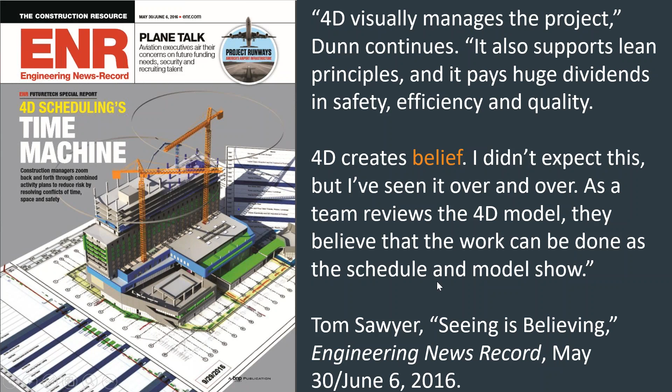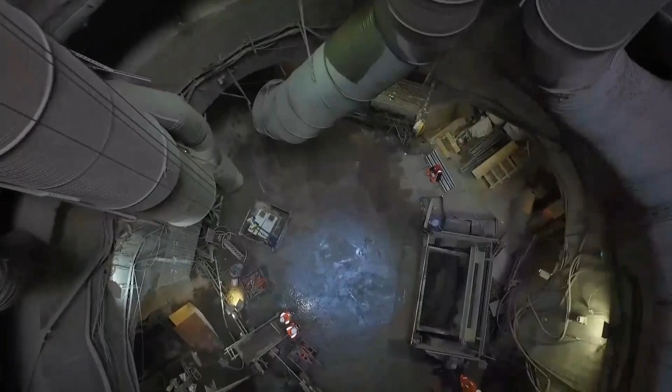I'm going to take a little different tack than I normally do. I encourage those of you who haven't yet read it to take some time if you want to digest more about 4D, this article by Tom Sawyer. Since we'll have some time together today, I want to tell you a little bit about myself. Construction is creating something where once there was nothing. It goes back to what is great storytelling, because as people we all connect with great storytelling. And what is storytelling? Storytelling at its essence is imagining something that is not and taking other people there with you.

So I appreciate that little clip. It's something that Synchro guys pulled out of some informal interview sessions. I'd much rather be out on a trail, and once we get off today, that's maybe where I'll head to see some of Blue Ridge. But we're looking at slides, so we deal with this as a format for communication. Got to put in a little plug. If you're on the West Coast for Airbnb, I had a great place at Oracle Open World a couple weeks ago where I was a 15-minute hike to this kind of view.

This is my family photo. This little girl, when she was 4, talked me into letting her drive her tricycle across the Golden Gate Bridge and back on a beautiful night, so it wasn't too bad. We had the sun setting on the Pacific and a full moon rising over San Francisco. And I've come to realize that as a parent, we're never really cut out for a challenge like that, to see life start, grow, be challenged, struggle, and hopefully eventually flourish and be independent. We come into similar problems on projects, and I'll be talking about some challenges we've observed and learned from in outages. But for me, the simple parenting truth I've come to shoot for is this: I want to keep the twinkle in that little girl's eyes. Remember that. We'll talk about it briefly at the end of our time.

There are a few things that I talk to every time I speak about project management or scheduling, and I don't apologize for that because to me these are very important principles. So what is scheduling? We're scheduling an outage or scheduling a construction project. Well, there's a science. We define activities, network logic, so we can track progress, predict completion. We struggle with that predicting completion part of the science, but we'll leave that aside for now. But it's also, and this is important, the art of communicating the schedule to stakeholders. We often forget about that, and because we forget about that, we fail by design.

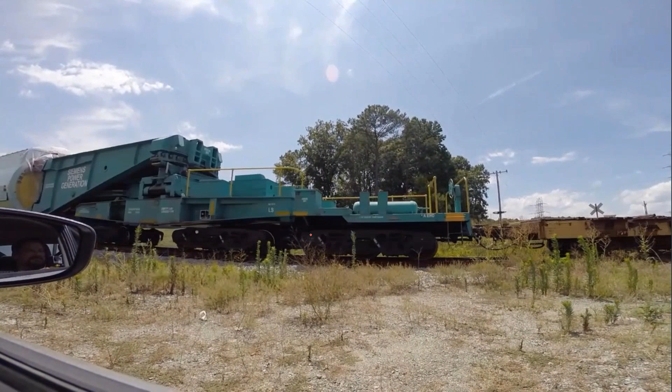It really is impressive, the things that a huge organization that's maintaining assets that power millions of homes and businesses can do. And just the effort to coordinate bringing this from the construction or manufacturing site to our site was a massive project.

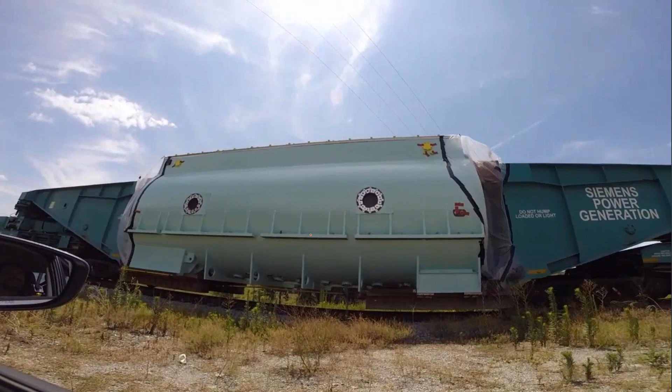So that number 10 lesson leads right into this number 9 lesson. Failure matters. We learn from experience. There's a Walt Disney quote. I've come to appreciate that we all need a good, hard failure. Now, I mentioned this to Tom DeGenis, and he sent me a quote from a politician that said, I've never failed, I've either learned or succeeded. Well, it came from a politician, so I'm going to call BS and say, no, we do fail. Let's tell the truth. But if we fail and learn, we can grow.

First outage, when we brought that stator in, we had a baseline target of 36 days, we went 69 days. By financial metric, by scheduled performance metric, that was a failure. There's a Disney quote for you guys.

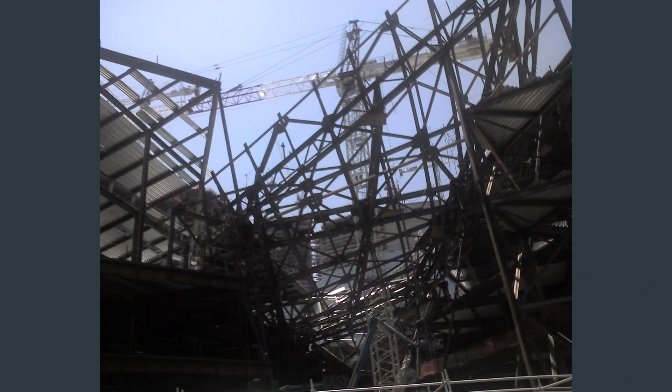Seen this kind of thing before. This is Las Vegas, the City Center project. That crane was the topic of debate when I was there in 2008. They didn't know how to demobilize the crane. They were worried it was going to cost them between a couple $100,000 to a couple million of unplanned dollars to demobilize the crane. Turns out they had a much bigger problem.

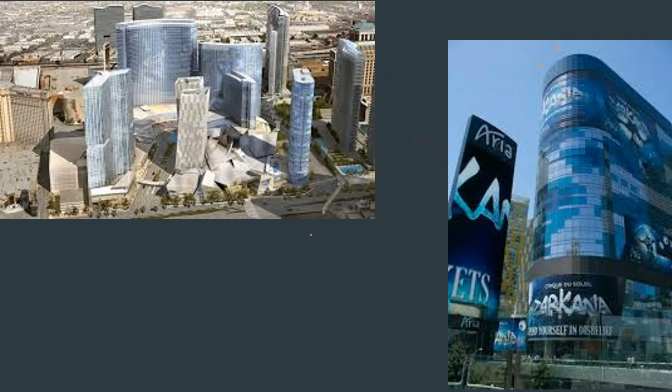Here you see the Harmon Tower. These top 20 floors were the top real estate of this, at that time, projected over $11 billion, largest privately funded project in the history of the world. They had to stop the tower right here because not too long after I heard about this crane, they recognized that in these first floors they had not tied off rebar correctly.

The project failed by a bigger metric. It killed 6 people, had 3 union work stoppages for safety concerns. Construction is an inherently dangerous and financially risky endeavor. But we have tools now and it doesn't need to be that way.

The project I was on, we sold a 4D effort. We had 3 years of services in place, and the day after that proposal was signed, this announcement was made, August 1st, 2008, that Boyd was suspending work on the Echelon project. If you go to the strip today, the steel is still there. It still looks the same.

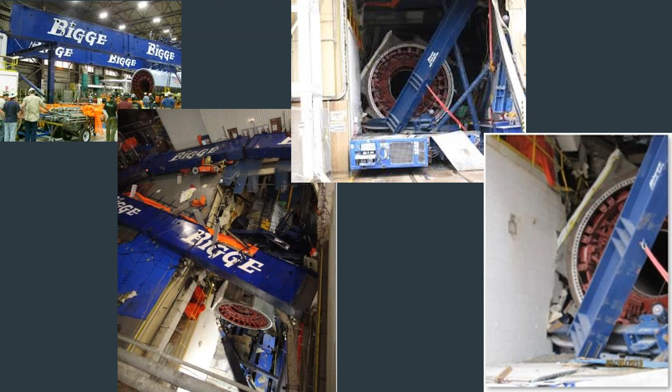We thought we had a failure fall of 2012, but the rigging device we used went to another site, and I stood next to these beams. They're about 2 feet taller than I am, and I'm 6'6". They're very wide, and those beams were in place in our facility and moved our first stator and our replacement. But at the next facility, there was a miscalculation so that as the stator was rotated to lower into the turbine bay, it collapsed. It fell into what is a switchgear room. Took both units offline.

We reset our expectations spring of 2013 when we saw this. We recognized that by some metrics, yes, we failed, but by another, we succeeded. We completed the project safely. We were putting power on the grid. Again, the worst part of the failure is that this young man did not go home that night. 3 other individuals who I sat with in a safety orientation 2 weeks before our outage went to the hospital that night.

These types of failures are not acceptable. And we have tools to have certainty, to get rid of risk, and create construction and maintenance, repair, and outage environments where we no longer have these kinds of stories at the end of projects.

Number 8, people, then strategy, then tools. Now, I didn't technically first learn this in an outage, but I've seen it really bubble to the surface. Here's a quote by John Wooden: "Players make plays. Plays don't make players." I've started to predict success first based on the team. Who's the implementation manager? Who's the project manager? Who are the supervisors? And no matter the tools we bring to bear, if the right players aren't in place, we're going to be in trouble.

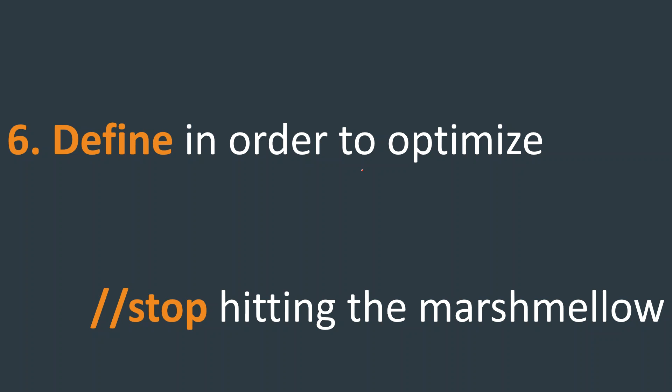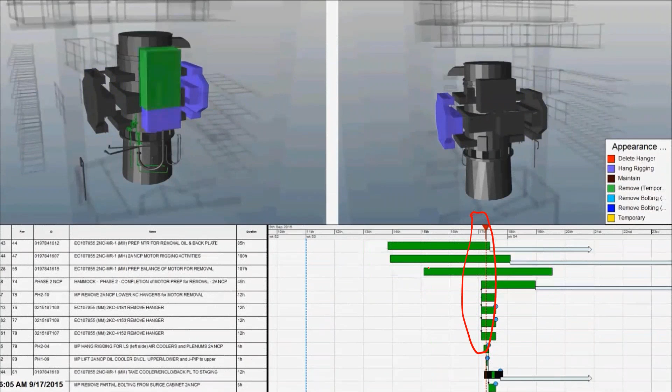We'll wail and wail at project challenges, but we've never defined to the right level of detail, and this is where I've seen 4D have a significant benefit, so that we can, for example, in this instance, understand every piece that we're taking off a motor and see with focus time. I call this focus timeline just a little bit of magic, that way it auto filters to what's working concurrently. But until we are willing to do this level of definition, we can't optimize. We're only going to get status quo or worse. We are not going to see better performance.

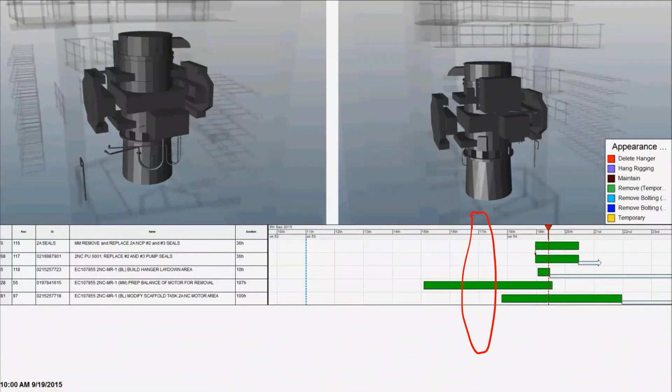The other part of this story is this is a work product of a young civil engineer who'd been in our building for 6 months, had never seen this motor, did the modeling from 30-year-old drawings, pictures, and hanger sketches, and became the leader in a lean review where we used this model and what we call a script that you'll see come up next with some very simple but down to the literally minute details of how we utilize overhead polar crane, lay down areas, and bring in key components.

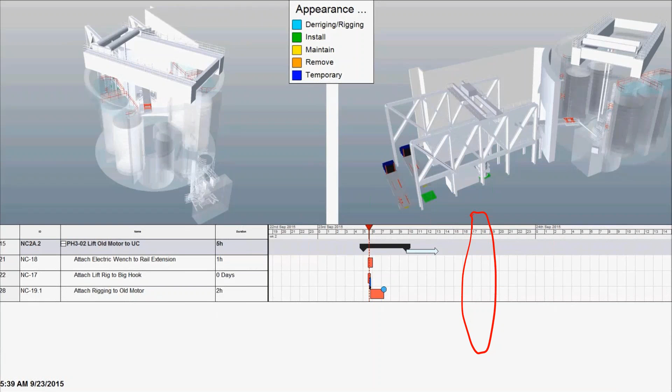I'll jump forward in this a little bit. And again, we took what had been an 8-activity schedule, turned it into approximately 90 activities. Those 8 activities were the smallest segment of an hour. We defined them down to 5 minutes. We understood every time we were moving anything and where we could, for example, consolidate more items, move them together.

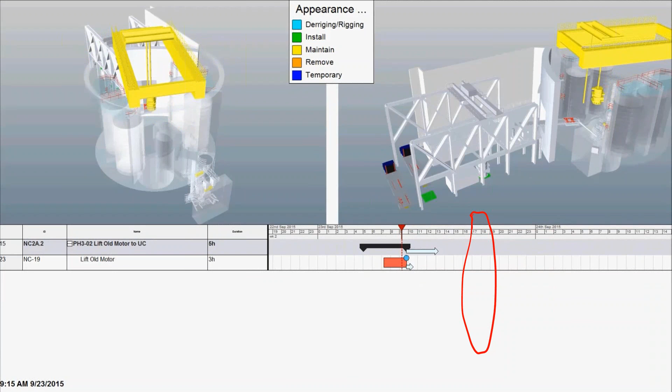We've moved from 42 hours of best performance to 25 hours at best performance when we own the polar crane. And generally when we have the polar crane for this project, we're on outage critical path. We define an outage critical path hour as having a value of $150,000 just for a ballpark number. So significant return on defining the problem so that we can optimize.

Know your priorities. This kind of baffles me now that I see how intuitive it is, but how often we fail to do this. What is your priority of work and why? This is what critical path should show us, but either we don't believe critical path or we run into problems and we lose our brains. And anyway, I've seen it where teams are just running around escalating everything and making everything urgent, which simply means nothing is a priority.

Congestion is only a problem if, and the answer to that is, you don't know your priorities. We'll have a congested workspace and, oh no, 2 to 3 guys or crews are supposed to be in there. What do we do? Well, that what do you do question should not be a question unless you don't understand your priorities. You work your priorities first, understand why, and then you continue on.

And just for personal curiosity, we raised concerns during an outage in an online tool. And so I tracked day by day, for all the work going on in an outage, some 13,000 activities, 1,000 to 1,600 extra employees on site, a significant volume of work, how many days during an outage would this congestion issue come up? And it was 100%. Every day I found an entry in that record where some crew tried to go do work and there was congestion.

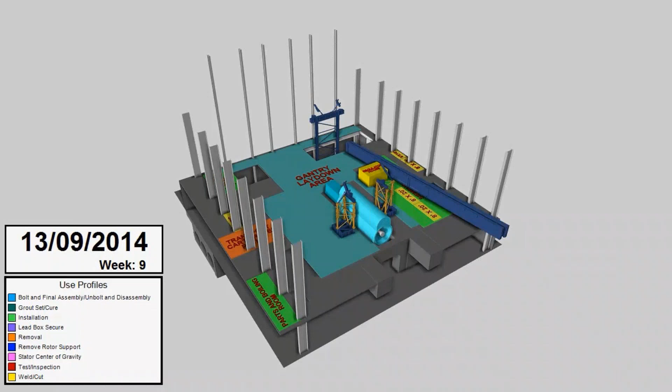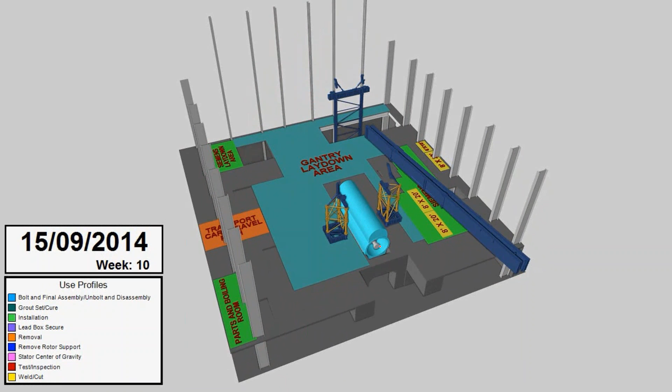This was a simple tool we used, didn't get down to level 4 detail, but to show the moves we were going to do, and this is how we planned for the following outage when we moved the stator. We had a different type of crane. The previous crane allowed us to articulate out of the way, so it was built before the outage. And the reason we would articulate out of the way is we're going to pull the rotor out, which is right there, using a different crane, but in this outage we could not pull the rotor with the crane from a different vendor. So we had to build the crane on critical path.

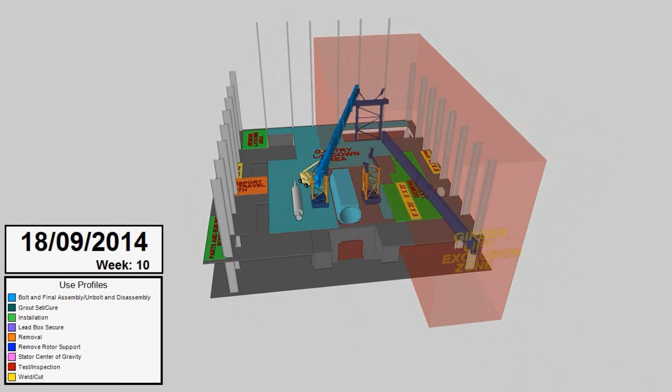So we want to understand these red boxes you're seeing we're using to communicate for safety. No work would be performed in those red box areas when these lifts were going on. And as it came time to lift the 1,000,000-pound stator, you can imagine there was significant oversight, interest, input throughout the organization on how we would manage that. And this became our tool for managing that work. So space matters. Space for safety, space for coordination, space for efficiency.

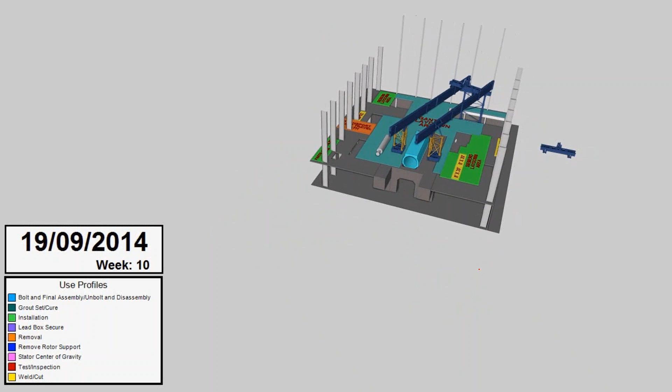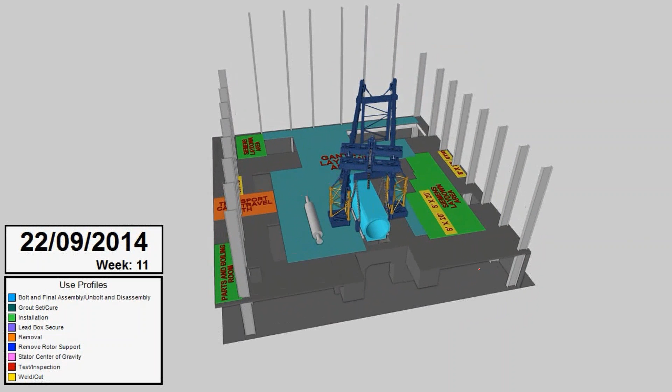And here comes the trolley that will lift and work on the stator. And this became the most valuable asset for both our safety manager and the primary vendor safety manager. We would export 3D PDFs to show what the site coordination conditions would be at a given place and time. So simple, but clear. There was no misunderstanding.

And we saw an additional value to this is that we could explain to the observers what the work would be, where the concerns were. They could raise additional concerns. And again, we were doing all of that explanation, not in the outage. We were working before the outage.

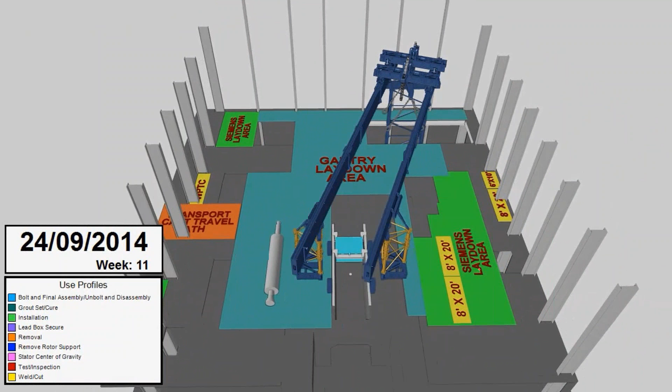Because often an observer will have a concern and they will stop work. And when you're stopping work on outage critical path, this is not good.

Number 2, simple truth creates the greatest sense of urgency. So I'll talk about how do we create a sense of urgency in our teams. Well, sometimes I'll argue that we drive away the sense of urgency because we confuse everybody. The plans aren't clear. The Gantt charts are illegible. The priorities aren't known. How do we solve that? Simple truth. And nothing creates simple truth for us, for an outage, better than 4D.

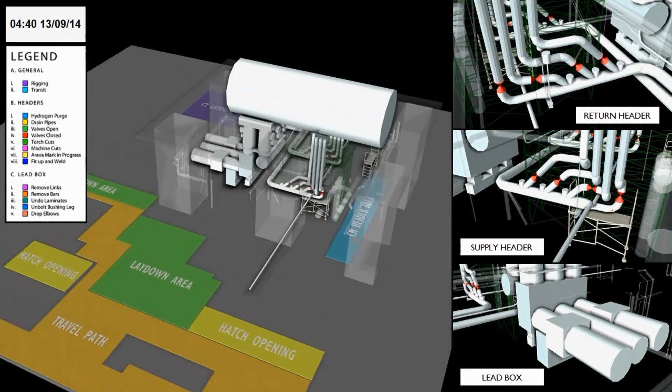And I've got proof. This project took us 4.5 weeks the first time around. We set a target to do it in 72 hours. The SME for our prime vendor who runs piping crews across the world said you couldn't do it. We're going to take the supply header over here, the return header, and the lead box, and all of those have to be out of the way so that we're clear to cut the lead box free and lift the stator off.

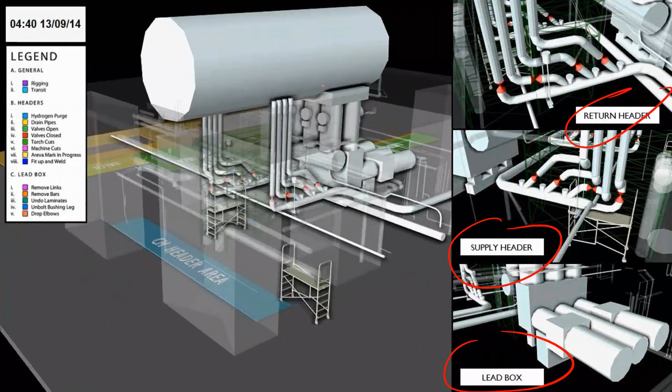We had this model built over a year out. We closed our detail gap. The scaffolding that's in place, the dance floor, so that we could work overhead and not stop work below. Every scaffolding sequence to support, and here on this legend off to the left, you see the things we do to communicate visually. And I'll often say, can your BI do this? There's no single business intelligence report or Gantt chart that's going to show you this kind of detail.

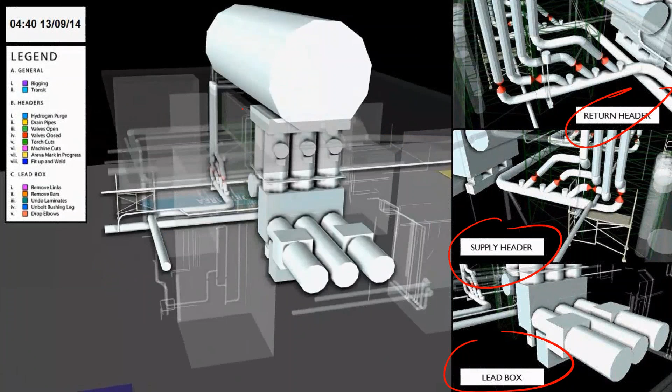And we had a schedule that actually showed every time we were turning a valve to drain it, every time we were cutting a pipe. And again, the end game is here, we've got to be able to cut free here to take this old stator out.

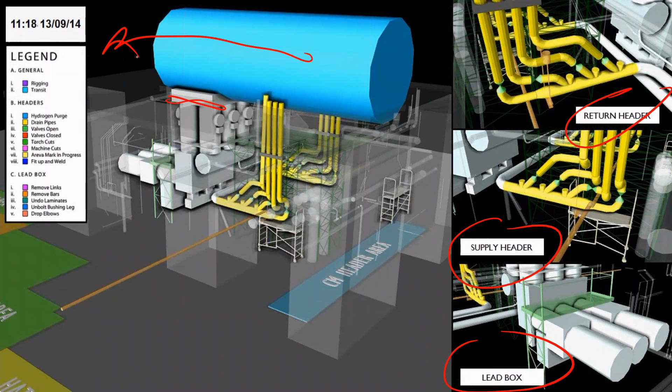And we went over this, we rehearsed it, we played with it, we experimented, we were aware of what our problems were. We worked with this lead box crew to actually understand everything they had to do in both the neutral and the mains to clear stuff, to break free, where we could store it. We had a clear, detailed understanding of everything in this schedule.

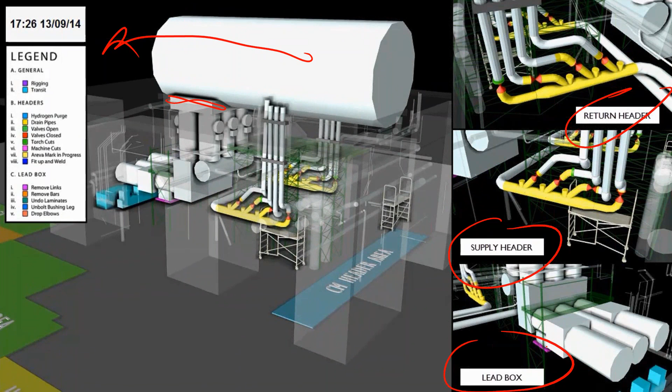We came in, and prior to coming in, I had a couple other things in this detail gap. Guys get excited about this. I had one guy frustrated that I canceled our weekly review meeting, and I couldn't understand that because normally no one's upset about canceling a scheduling meeting. Well, it's because he wanted to see this, and the team wanted to see it. Now I talk about it. It's like I'd canceled recess. This was our opportunity to play, understand, close this detail gap, understand things.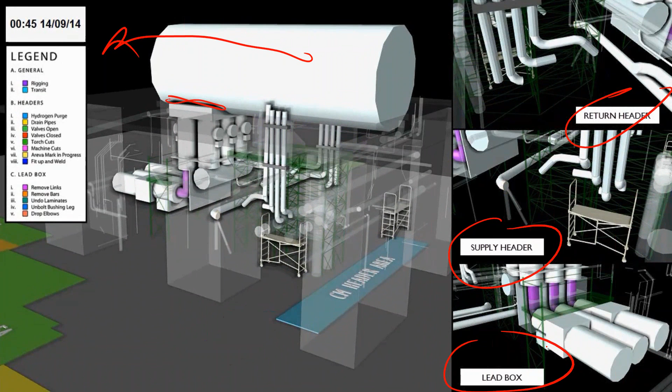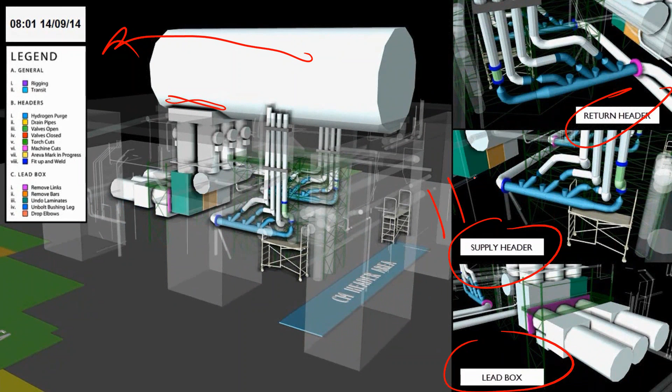Well, night 2 of the outage, I met with the night shift supervisor. I said, hey, Bobby, how's it going? He said, Charlie, this is easy. We've got this. We've been here before. At that point, they were within 2 hours of on schedule. They were early on the supply header side. They were right on schedule on the return header side. They finished the supply header side 11 hours early. Out of 72, the return header was finished 1 hour early.

Now, in an outage, you really do want to be right on schedule. You can create problems if you're not communicating well and you complete work early. And then these guys, the lead box also, they completed on schedule. So these guys were on time.

And I'll quote the Genesis song in referring to this project often, that we came from the north, we came from the south with picks and with spades in a new kind of order, showing no fear of what lies up ahead. They'll never see the likes of us again.

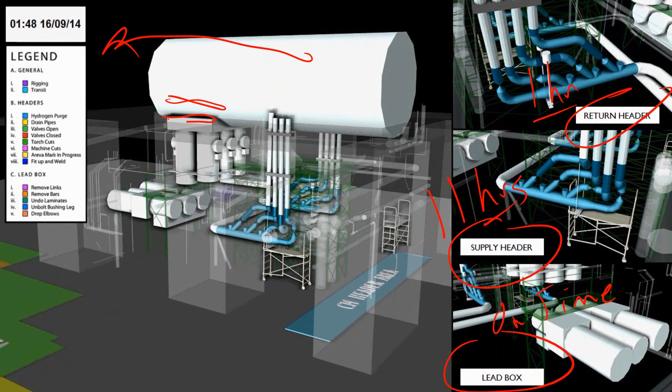So we met that schedule, but we did something else. When we cut this lead box free in 2012, prior to being able to cut it, there were 26 hours of abatement. You can see my normally not great handwriting is made even worse by this tablet. So 26 hours of abatement to cut that lead box.

Well, something happened. There's a guy in the room 13 months before this project who saw this detail and he said, Charlie, I've got 11 places in here where I have to abate. And those 11 spots, we're going to shut down work for 12 to 24 hours because of the cone of influence, the options that we have, either chemical or sandblasting. So we recognized we had a problem. Now, we recognized that problem well in advance.

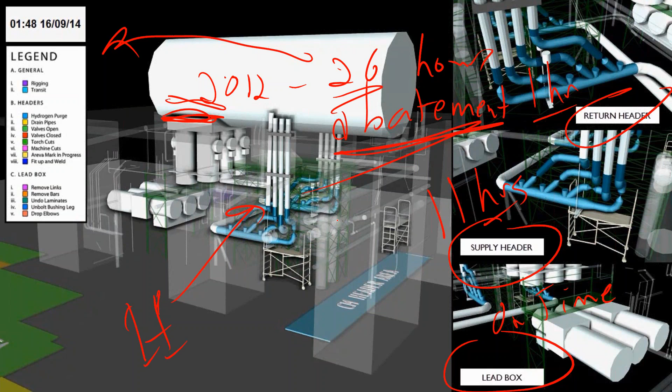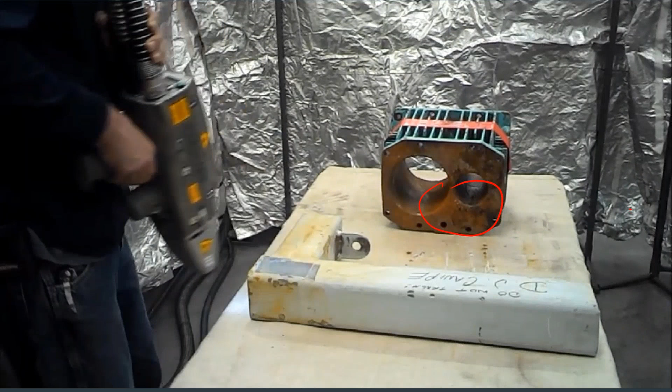And that allowed us to go do some research. The individual who came to me, those are his initials on this piece of steel. Because we recognized this well in advance, we were able to go out and research. At the time, there were only 4 of these in North America. So this is a laser abatement machine. There's fiber optics running to that head. It goes through paint, rust, oil, down to bare metal.

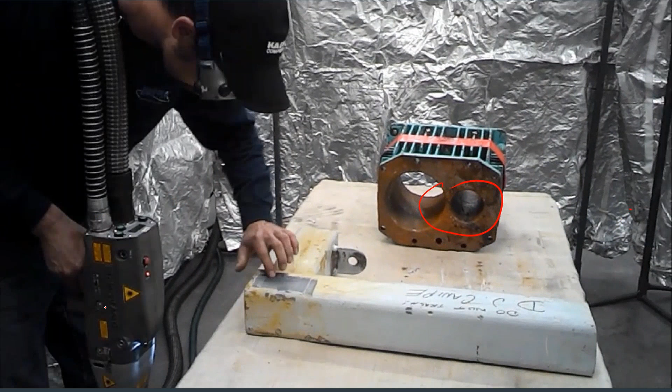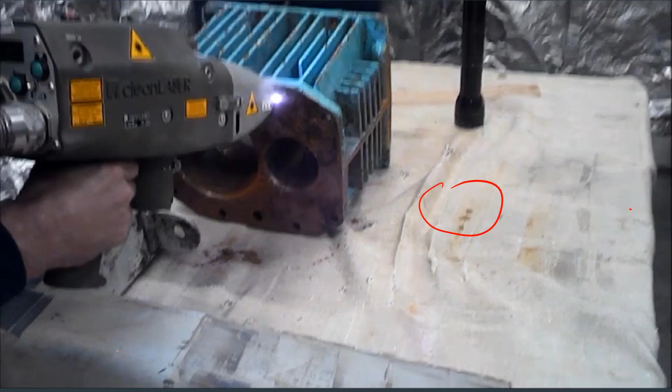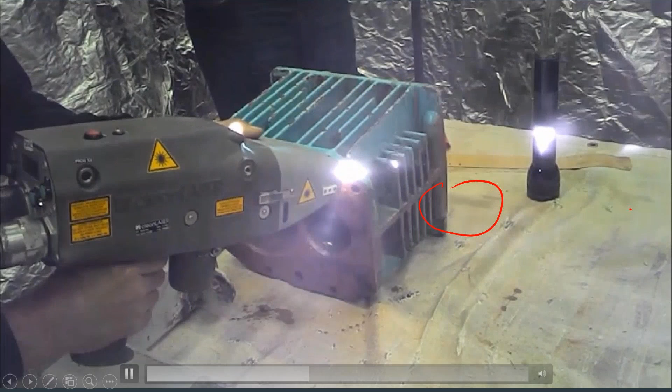Now, if I had not worked with DJ, had this opportunity 13 months out, and we'd done our normal schedule review, and here I'm going to pause this for a second, see if I can go back a couple of slides. It's my first time trying to write like this. So normally, and this is how I developed this detail gap theory. So I'm going to go ahead and put that on here.

Boy, I'm terrible on detail gap theory, right? So detail gap theory is what I observed about 2 weeks before the work. Inside of 2 weeks, I started getting different answers as we would do schedule reviews. And so that became the question in my mind: how do I get the 2-week focus well in advance?

Now, to get that laser abatement piece of equipment in, we pulled the trigger out here, like at 13 months. So we had to go through contracts and approval and EH&S. We had to get it in the plant, and we had to test it in the plant. And we had some problems. We had a head go on, so then we had to get all these final approvals.

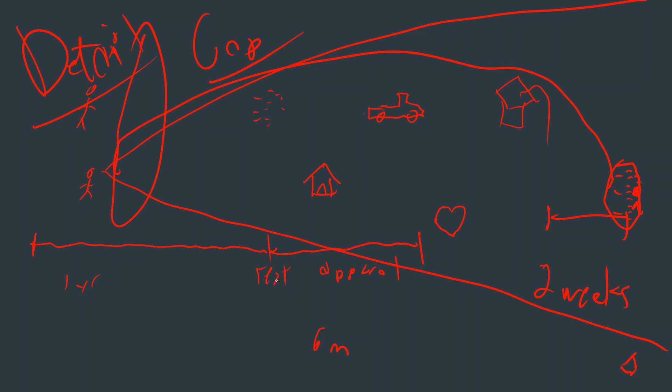What's happening? What do you see here? If I recognize this as a problem with DJ 2 weeks before the outage, the ship sailed. There's no answer but to brute force through it. But if I recognize the problem early enough, now I've got this runway to go get better equipment and solve our problems. So with DJ, we really proved that detail gap theory. We had magic happen. Why?

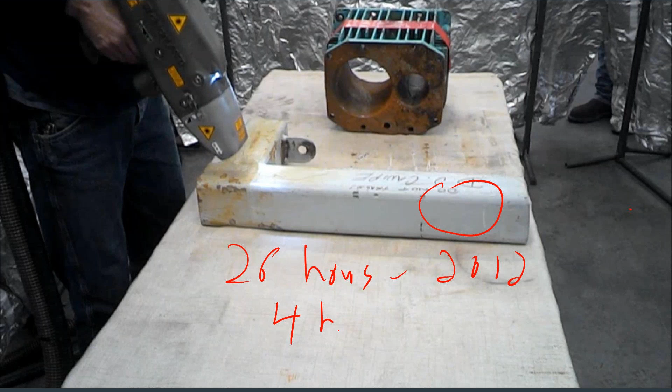Well, that abatement was 26 hours of critical path in 2012. We did that in 4 hours in 2014. 22 hours at $150,000 an hour on true critical path in the outage is a significant return. It's financial magic. It's almost too good to be true. But over and over, we found those almost too good to be true opportunities because we took the time and the effort.

And what I now say is it's only 15 to 20% more effort, if you have a model, to build a 4D schedule than to build a traditional Gantt chart schedule. And if you use certain approaches, you can improve on that even better. So where does that leave us? Well, if we're practitioners and we're doing complex projects, whether outages or construction, we absolutely must disrupt or will be disrupted.

Primavera disrupted Artemis. Primavera P3 was disrupted by Primavera P6. There are now efforts underway to disrupt that as a platform. And this is why, like I said, I'm tired of the conversation. Should we be doing 4D? Absolutely. Model, but model and understand both your model space and your construction or project delivery time.

So I'm going to come to the end here and have an opportunity for questions, but wanted to circle back. I also learned a lot from a project manager, and this is one of his bulls. We were at his house, and what you're not seeing is that there's a bed of a pickup truck, and there are 5 kids and 3 adults in the bed of the pickup truck. Skip's driving the truck. Another friend of mine's riding in the truck. I'm on the ground with another project manager, and then Skip's wife. And we were all feeding the bulls and the cows bread.

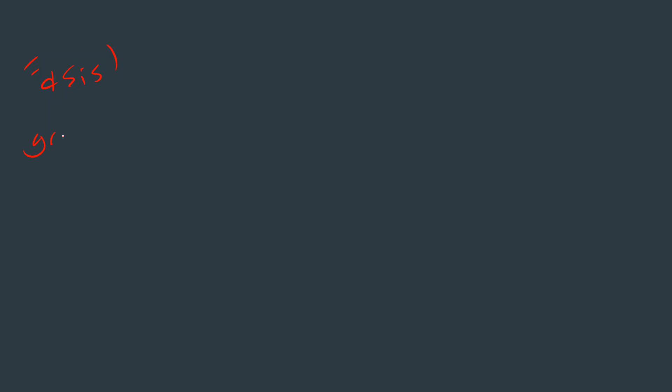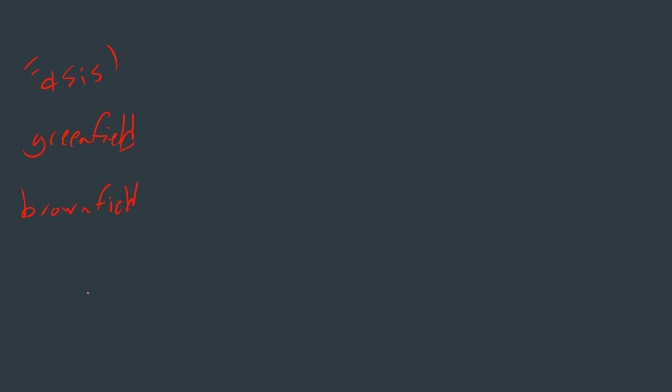So what I've learned is on any project we have our as-is conditions. Okay, so maybe that's a greenfield where it's a new construction project, or maybe it's like what we deal with, which is a really complicated brownfield. We're going in and changing what's there. But we spend a lot of time documenting the as-is conditions. We do surveys, we do attempts to get at as-builts. I think as-builts are a fairy tale, which is why I say as-is. I'm a big fan now of going in and doing scanning. But we have all this work we do for our as-is conditions.

And then on this side of the spectrum, we have our to-be, our final state. And I especially emphasize this when I talk to guys who are heavy into BIM, because that's great. What is BIM? BIM is the to-be, that's the final state. So we talk about clash, we talk about the environmental impact, we talk about all sorts of technical features of the building or the product or whatever. For us, in the final to-be state, we're going to have an EC change that's going to impact how we operate certain things in the plant.

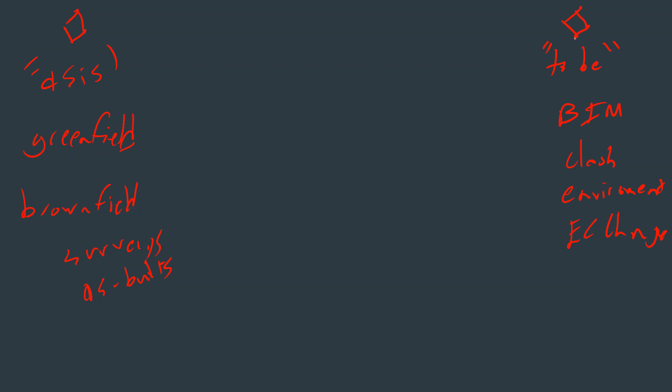Well, so I guess what I'm trying to communicate is we spend a tremendous effort here getting these as-is conditions documented well, and here making sure that at turnover, because that's really what all this leads to. So come down here and we have turnover. But in the middle, there's another gap. This is not the detail gap, but what happens here? We turn it over from the as-is conditions. We sign contracts. We bring in crews. We do, for us, tag-outs, whatever we do, and we do what's called construction.

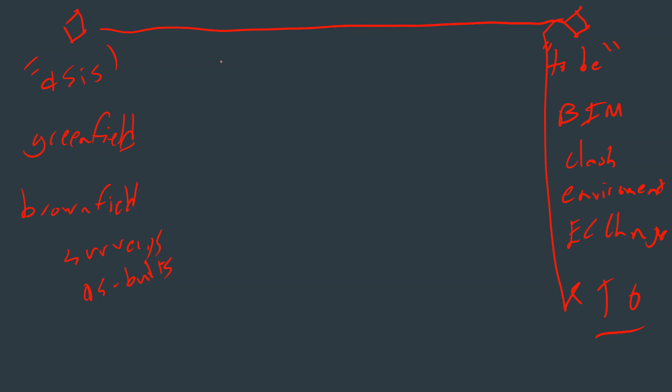But we don't apply the same effort to construction that we applied in the as-is or in the to-be state. And often, unfortunately, what we end up with is chaos, which is why we don't understand priorities. We struggle with space. We have congestion. We have unfortunate and often tragic safety events. So this is a big word. Don't choke on it, but it makes a point. There's a word consilience. So consilience is unity of knowledge.

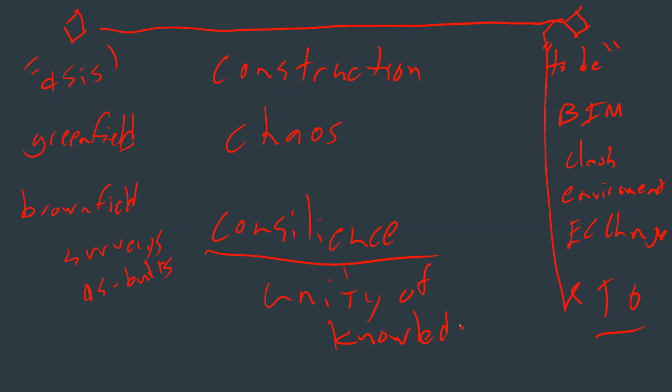And stop there and think about that word unity. When was the last time you were on a job site and what you would observe about that job site was unity? Not often, most likely. So consilience is this effort to, instead of having fragmented or siloed areas of expertise, is there a way that in this construction phase we can have consilience? We can have unity of knowledge. We can have a universal language, a common understanding of our problem. Absolutely. That platform is 4D.

It's very important to us in outages. I trust for most of you it's already an important part of your projects, and we're simply going to improve how we deliver work with 4D. And if not, come on in, the water's fine, and hopefully we'll have good stories to tell together in the future.